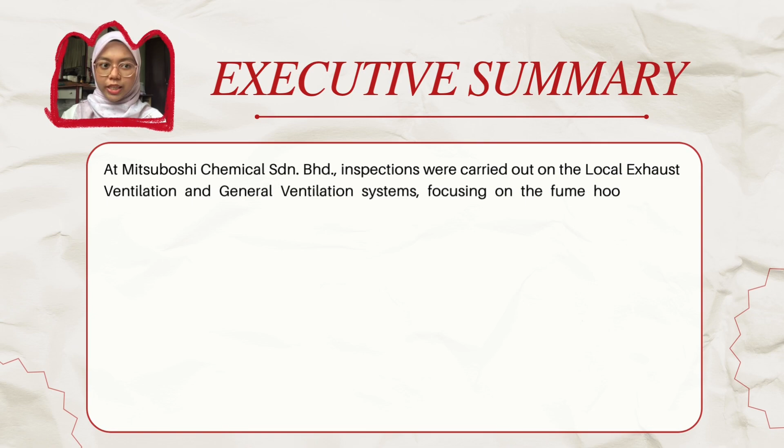At Mitsuboshi Chemical Sdn Bhd, inspections were carried out on the local exhaust ventilation and general ventilation system, focusing on the fume hood in the polypropylene laboratory.

A qualified hygiene technician conducted visual inspections and functional tests, including smoke testing, face velocity, and airflow measurements, using instruments such as vane anemometers, pitot tubes, and manometers.

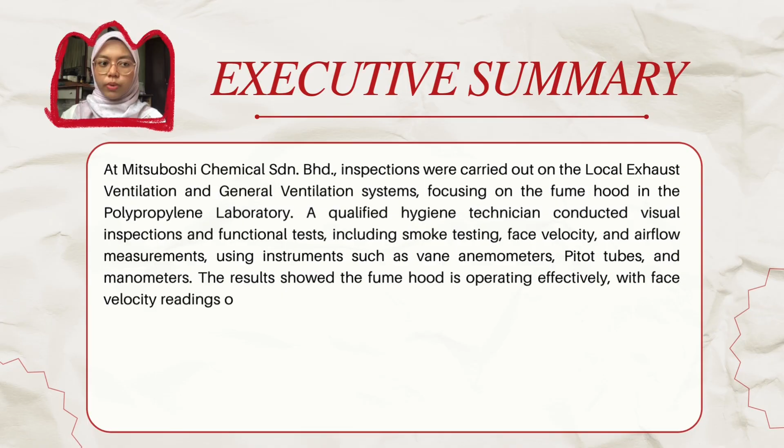The results showed the fume hood is operating effectively, with face velocity readings of 83 and 89 fpm, which are within the recommended 80 to 100 fpm range.

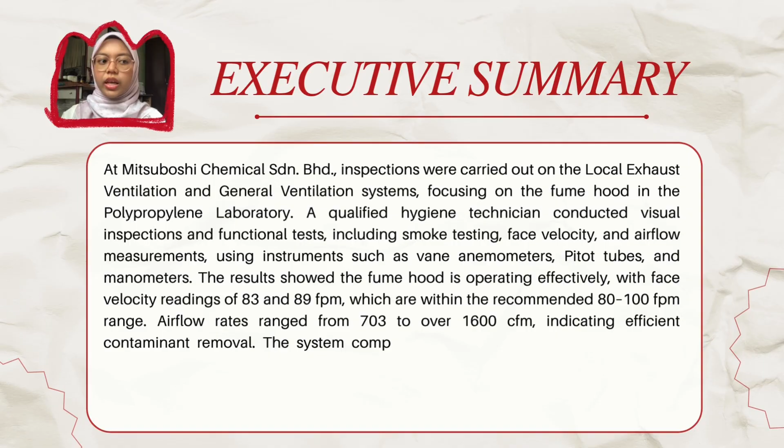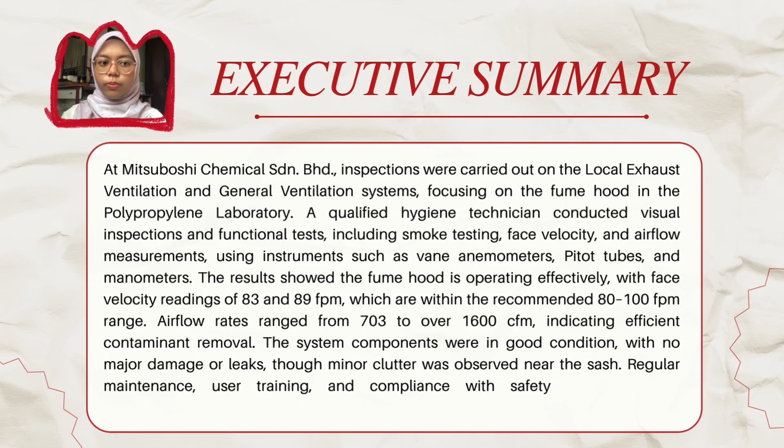Airflow rates range from 703 to over 1,600 cfm, indicating efficient contaminant removal. The system components were in good condition, with no major damage or leaks, though minor clutter was observed near the sash. Regular maintenance, user training, and compliance with safety regulations are recommended to maintain system performance.

Firstly, I will start with the introduction. This monitoring was conducted at Mitsuboshi Chemical Sdn Bhd, located in Kemaman, Terengganu.

This monitoring was conducted by Isha binti Irman, me, Norhanah binti Tajuddin, Wan Fatimah Amna binti Wan Muhammad Hanafi, and Umairah Quratunisa binti Muhammad Sabri.

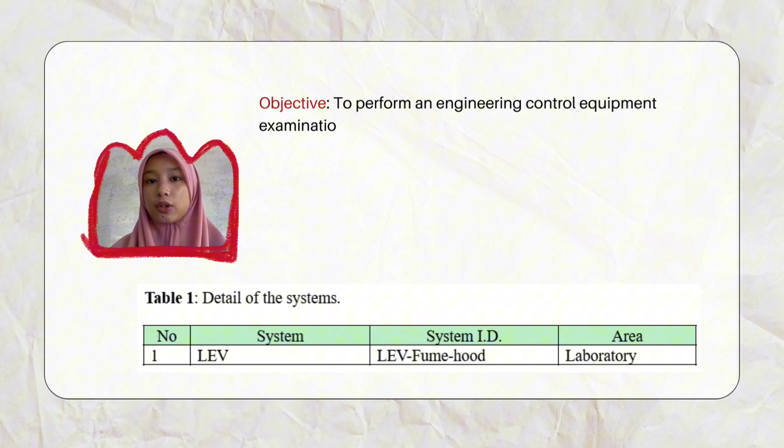The objective of this monitoring was to perform an engineering control equipment examination and performance assessment. The process was conducted in the laboratory.

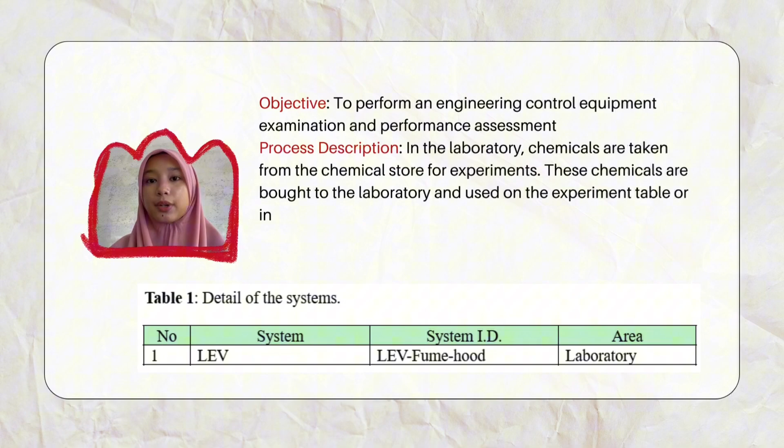Chemicals were taken from the chemical store for experiments and brought to the laboratory to be used on the fume hood. One local exhaust ventilation system was inspected. The table below shows the details of the system.

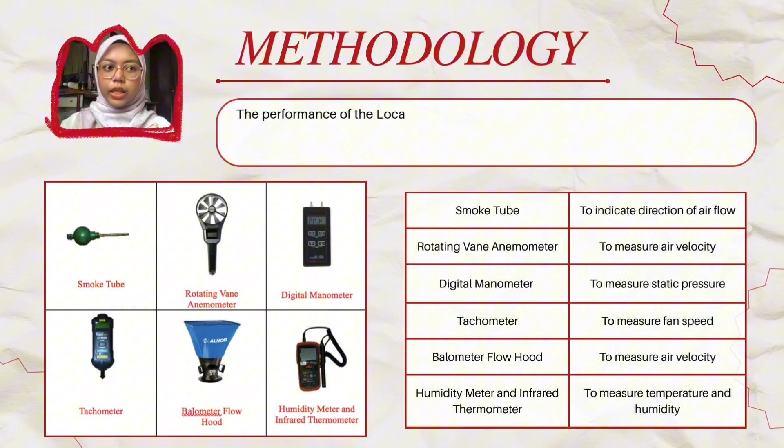Now, we are moving on to the methodology. The performance of the local exhaust ventilation and general ventilation system are evaluated based on the data gathered from on-site measurements within the exhaust ventilation system.

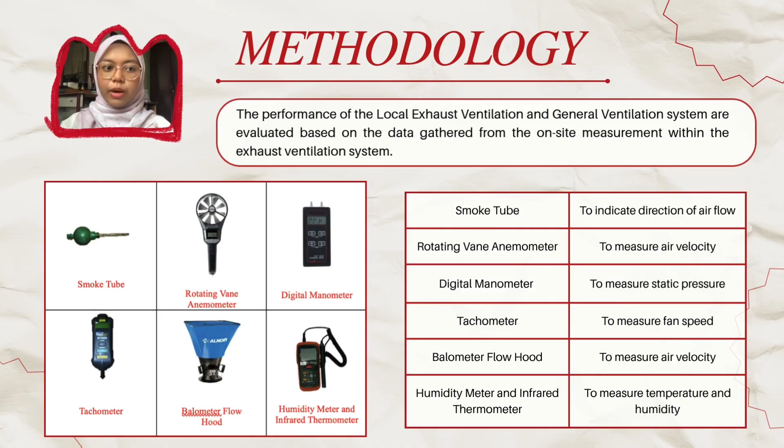This table indicates the instruments used to evaluate the general ventilation system and local exhaust ventilation system. Firstly, we have the smoke tube to indicate direction of airflow, rotating vane anemometer to measure air velocity, digital manometer to measure static pressure, tachometer to measure fan speed, balometer flow hood to measure air velocity, and lastly, humidity meter and infrared thermometer to measure temperature and humidity.

Next, for the system inspection of the hood area, we must check the physical condition of the hood and surrounding area, identify the type of hood installed and its suitability for the process, and observe the condition of the work area around the hood.

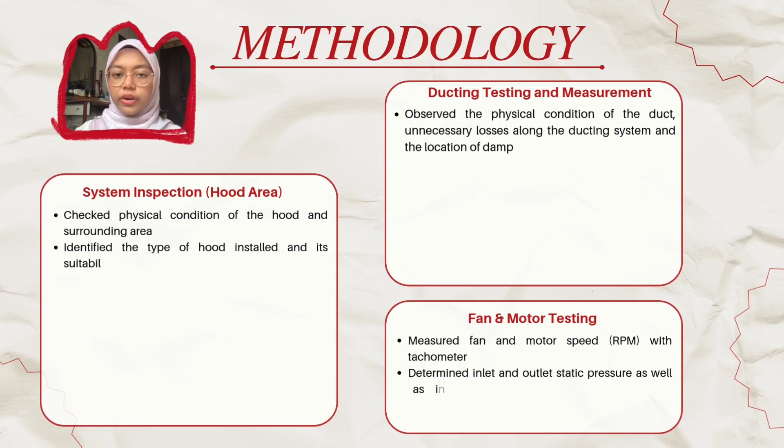Conduct a smoke test at one duct diameter from the hood face, observe the airflow pattern and the release smoke, and lastly, take hood velocity measurements to measure the capture velocity using a rotating vane anemometer.

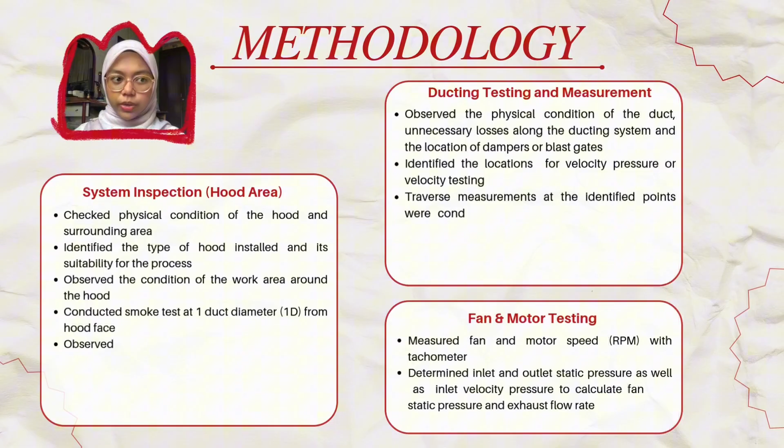For the ducting testing and measurements, firstly, we must observe the physical condition of the duct, unnecessary losses along the ducting system, and the location of dampers or blast gates.

Then, identify the location for velocity pressure or velocity testing. Traverse measurements at the identified points were conducted using a pitot tube and digital manometer. Lastly, the velocity pressure and air velocity in the ducting system were then determined.

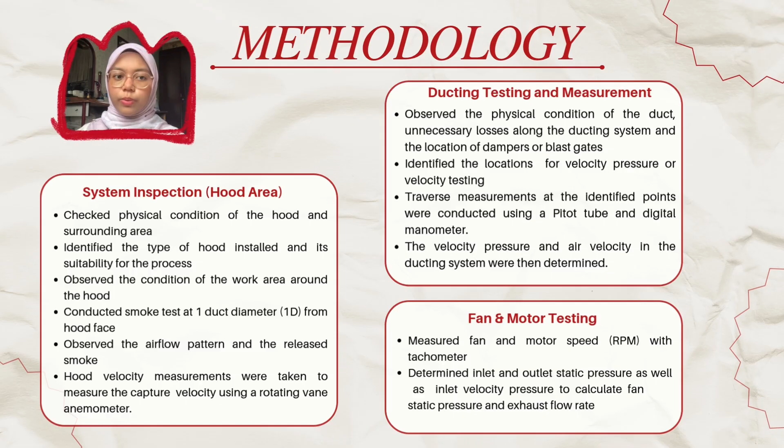Continue with the fan and motor testing. Firstly, we must measure fan and motor speed (RPM) with a tachometer, and then determine inlet and outlet static pressure as well as inlet velocity pressure to calculate fan static pressure and exhaust flow rate.

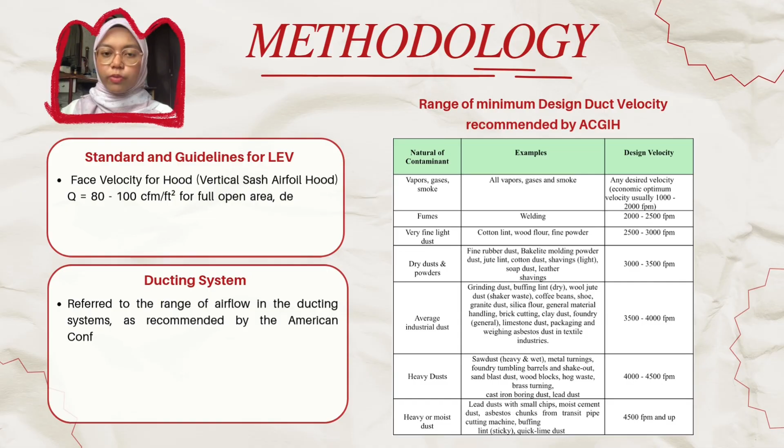Next, for the standards and guidelines for LEV, we follow the face velocity for hood, vertical sash, airfoil hood, which is Q equal to 80 to 100 cfm per square feet for full open area, depending on the quality of supply air distribution and the uniformity of face velocity.

Lastly, for the ducting system, as indicated in the table, we refer to the range of airflow in the ducting system as recommended by the American Conference of Governmental Industrial Hygienists (ACGIH).

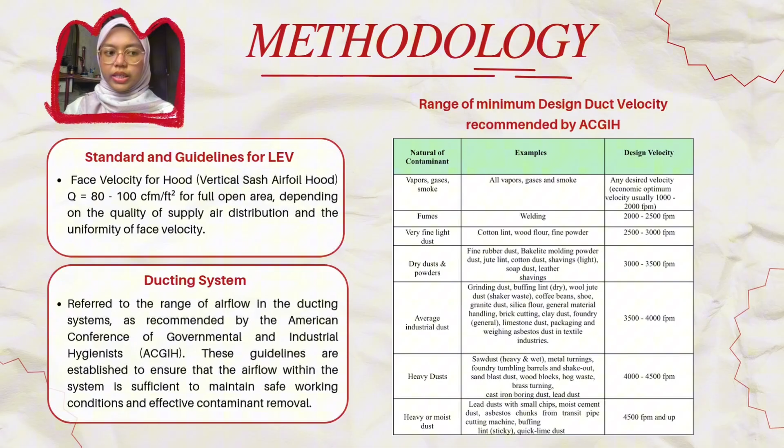These guidelines are established to ensure that the airflow within the system is sufficient to maintain safe working conditions and effective contaminant removal. From the result, we found that the fume hood system is working effectively and meets the recommended standards. The face velocity, which measures how fast air is pulled into the hood, was within the safe range.

83 feet per minute for the current test and 89 for the baseline. This shows that the hood can capture chemical vapors properly.

The airflow or face flow rate was also good, over 700 CFM, meaning contaminated air is being removed efficiently. The transport velocity through the ducts from hood to the fan also met the requirement, between 1000 and 2000 FPM. That's important because it prevents dangerous vapors from staying in the duct.

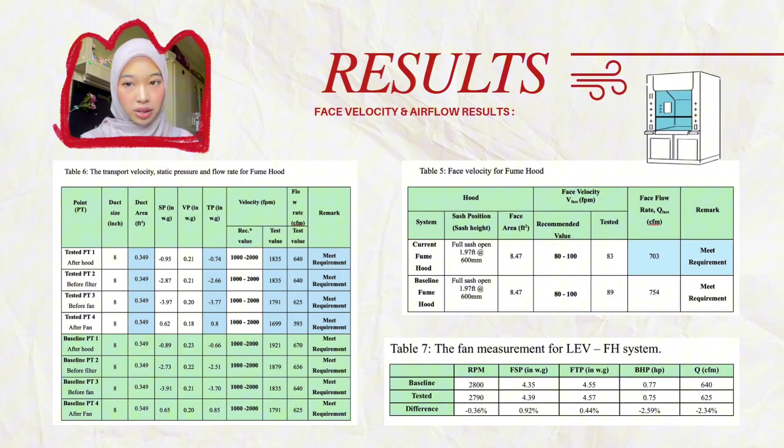The fan performance was strong. Pressure, RPM and horsepower were very close to the baseline, showing that the fan is still efficient and running smoothly.

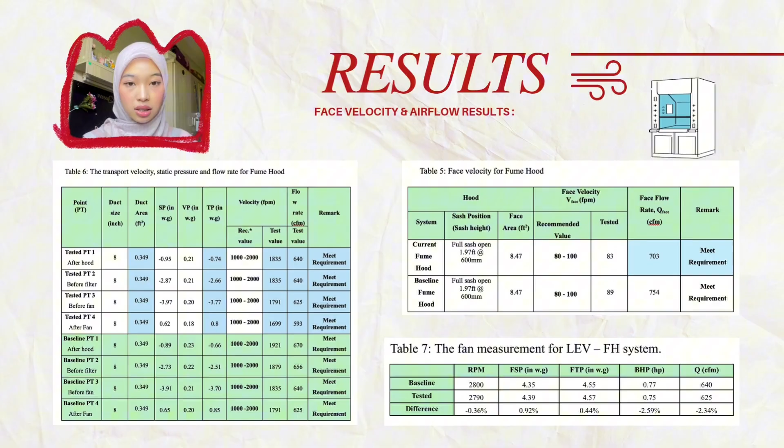During our visual inspection, we saw that the system is well maintained. The hood is a vertical sash airfoil type, the PVC ducting had no leaks, and the centrifugal fan was in good condition. We also ran a smoke test and it showed smooth airflow with no cross draft. That means the contaminated air goes exactly where it should.

But we did notice a few lab items like chemical bottles placed inside the sash. Even though they didn't block the airflow, it's still better to keep that area clear for maximum performance.

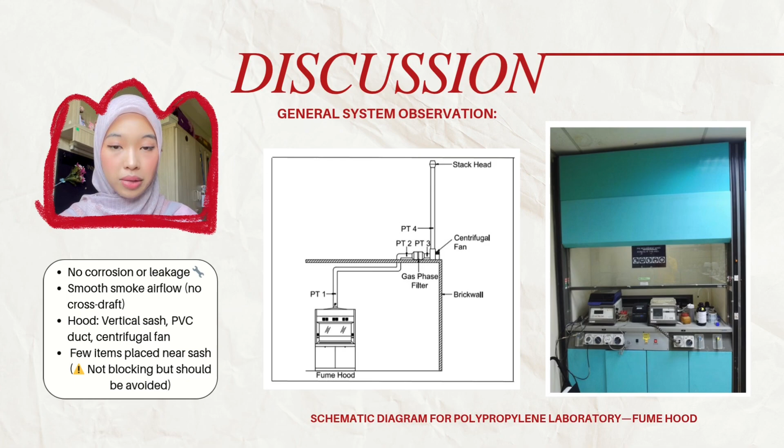From what we observed, lab users are generally following safe practices, but there's always room for improvement. Here are some important reminders. First, keep the sash at the recommended height. Second, don't lean into the hood. And third, avoid placing too many tools or bottles inside. Even small things like this can affect airflow and user safety.

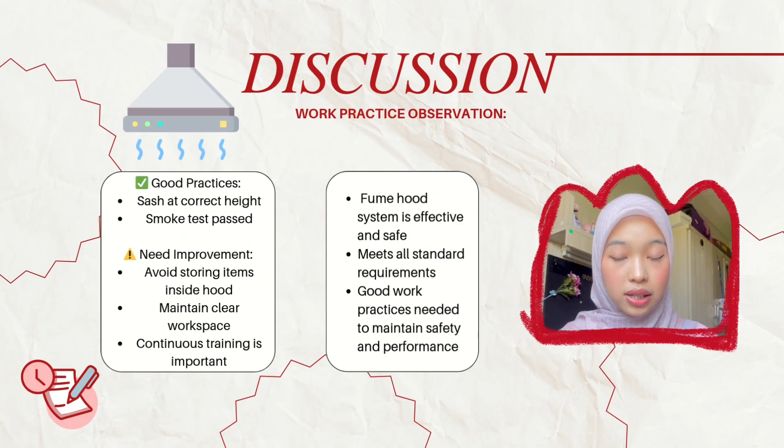Regular training and good housekeeping habits can help keep the system running well and make sure everyone stays safe from chemical exposure. So, in conclusion, the fume hood system is working well, but it's important to always use it properly and take care of the workplace.

For recommendation, we recommend to do system improvement. First, inspect components such as check for damage for hood ducting and fan performance, filter saturation, and duct blockage. Second, do routine maintenance for fan motor, and consider a balance between equipment and environmental factors. Third, do system testing. Measure airflow, check static pressure, and assess noise for fan issues.

Next recommendation is to do work practice improvement. First, employee training. Educate workers on risk and proper LEV use. Second, monitoring and reporting. Regular air quality checks and ensure quick response if exposure limits are exceeded. Third, SOP. Provide clear guide for safe fume hood operation and maintenance.

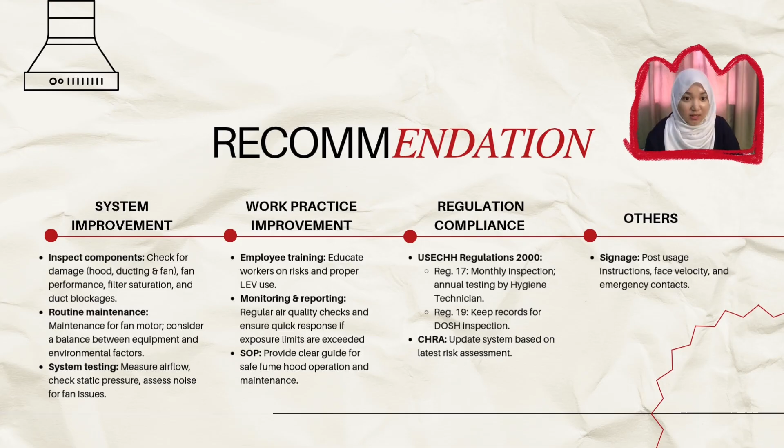Third recommendation is regulation compliance. First, USECHH Regulations 2000, Regulation 17, monthly inspection, annual testing by hygiene technician. Regulation 19, keep records for DOSH inspection. Second is CHRA, update system based on latest risk assessment. Other recommendation is signage, post-usage instructions, face velocity, and emergency contacts.

The purpose of this inspection was to assess the performance of the local exhaust ventilation, LEV, system based on the USECHH Regulations 2000. The results show the LEV system, including the fume hood, meet the required standards.

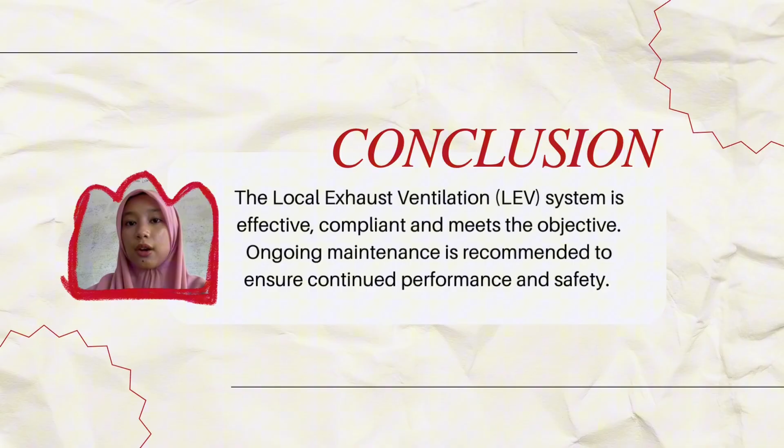The measurements of the face velocity and the transport velocity are within recommended limits set by the American Conference of Governmental Industrial Hygienists, ACGIH. The measurements show the effectiveness of capture and removal of contaminants. The fan and ducting system were also found to be in good condition.

In conclusion, the objectives of this inspection were achieved. The LEV system is working well and complies with regulations. Regular monitoring and maintenance are recommended to keep its performance and ensure workplace safety.